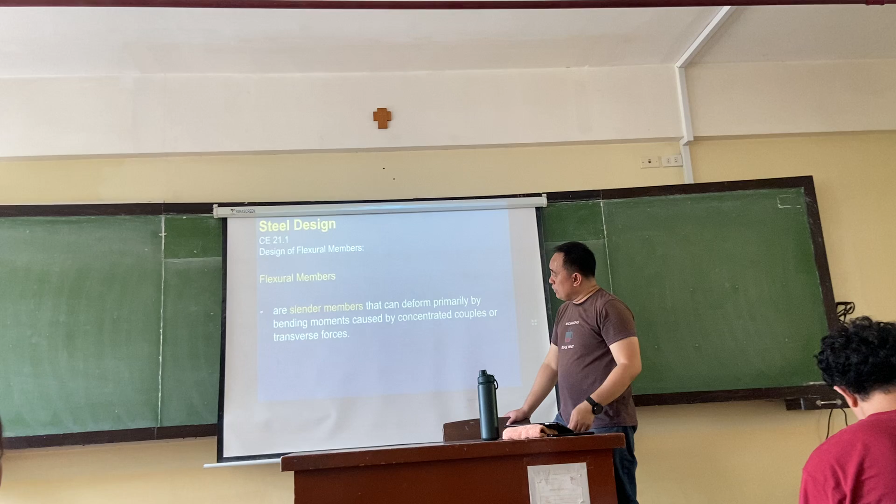We are going to learn about flexural members, our flexural members. These are basically slender members that can deform primarily by bending moments caused by concentrated couples or transverse forces.

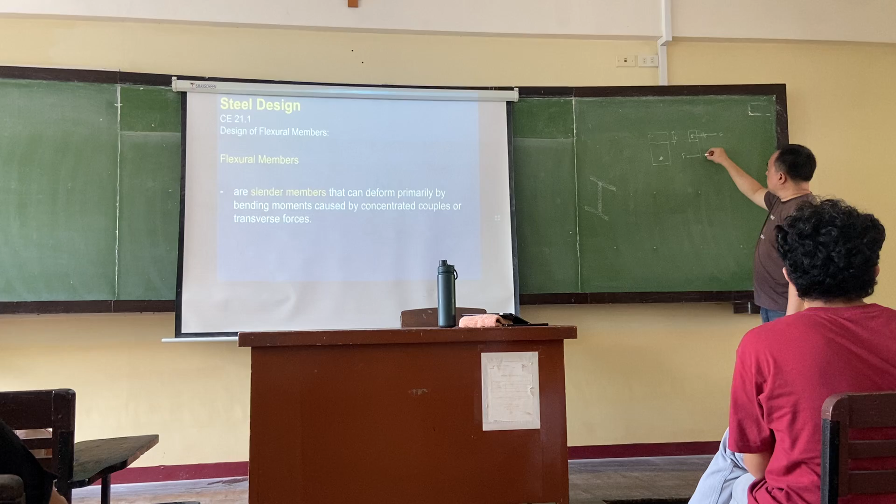So these form - a very common example is the RC rectangular beam. There is a compression force C, a compression block, and then somewhere here is your stress, opposing in opposite direction, separated by some distance, in this case d minus a over 2. This will create your moment.

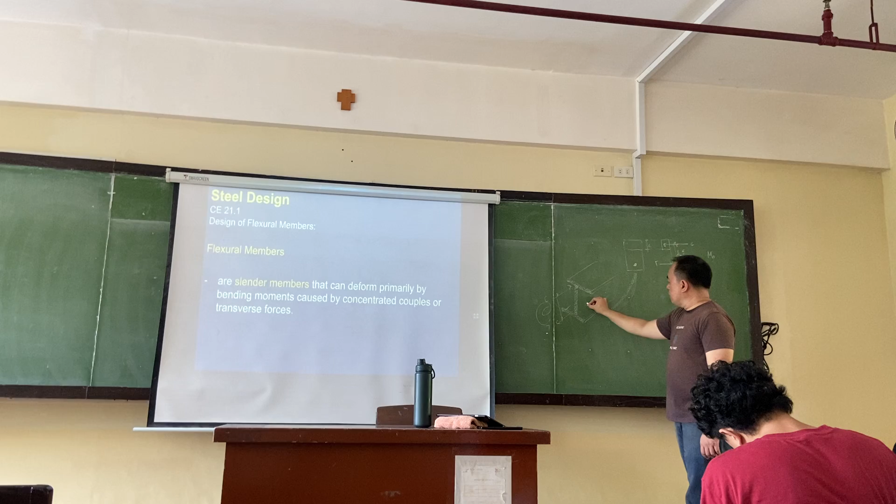If this is your wide flange, for example, and we apply a load on it, the upper fiber will be compressed and the lower fiber will be in tension. Together with that separation, they will create a moment which will cause your beam to bend that way, or if the force is applied the other direction, it will bend toward that side.

It's the same concept, but the parameters are different because we are talking about steel instead of concrete. We will be dealing with this, and we will follow equations from our NSCP for the computation of our nominal moment.

Of course you already know this - you have your beams, and then you have your beam columns. Actually, all columns can be considered as beam columns because aside from axial forces, we also have some amount of flexure in your beam column.

So for our flexural members in steel, we will be computing for the nominal strength - in this case, our nominal moment. Same as before, for LRFD we will have our reduction factor, now with subscript b, denoting that it's for bending.

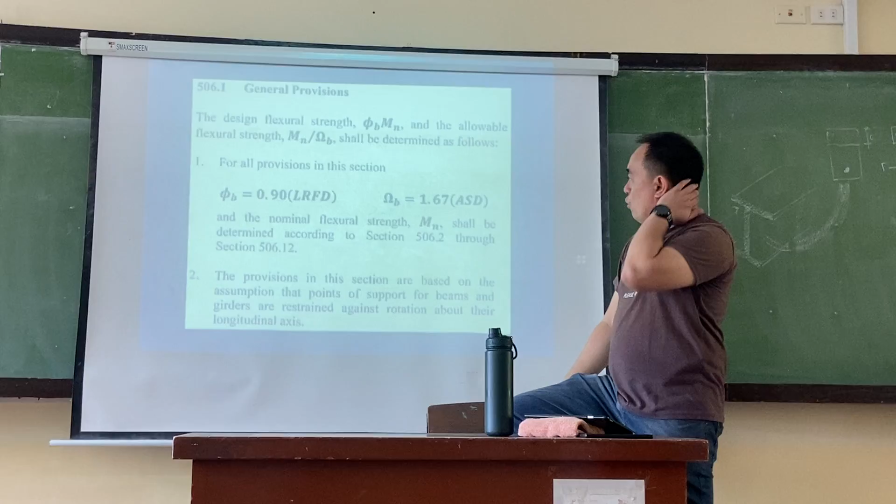But if another notation is used, you can omit the subscript as long as you know what you're doing, since it's actually the same for all provisions. In this section, your reduction factor is 0.9, and your safety factor is 1.7 or 0.6, for your nominal flexural strength, or nominal moment, denoted by M sub n.

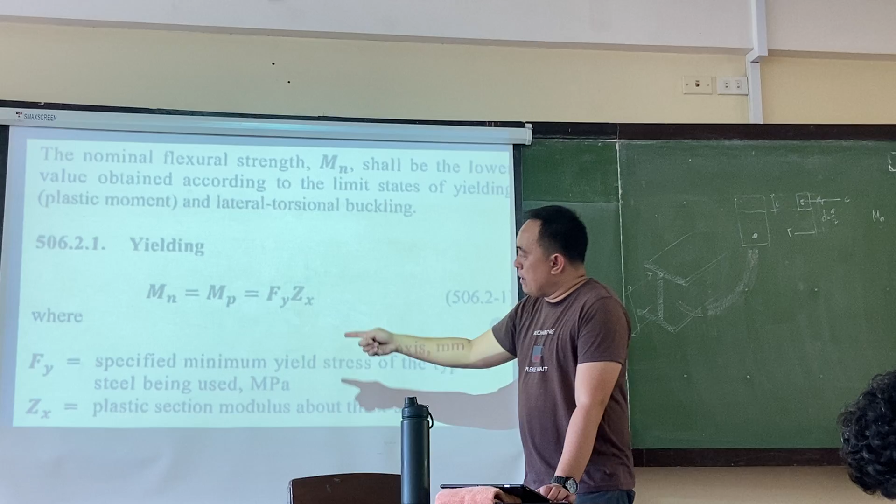So in computing, you have your Mn equals Mp equals Fy times Zx. And then you have here a different factor, your Z sub x - instead of the typical gross area or effective area, you will have this Z sub x, which is called your plastic section modulus. I will explain later where that comes from.

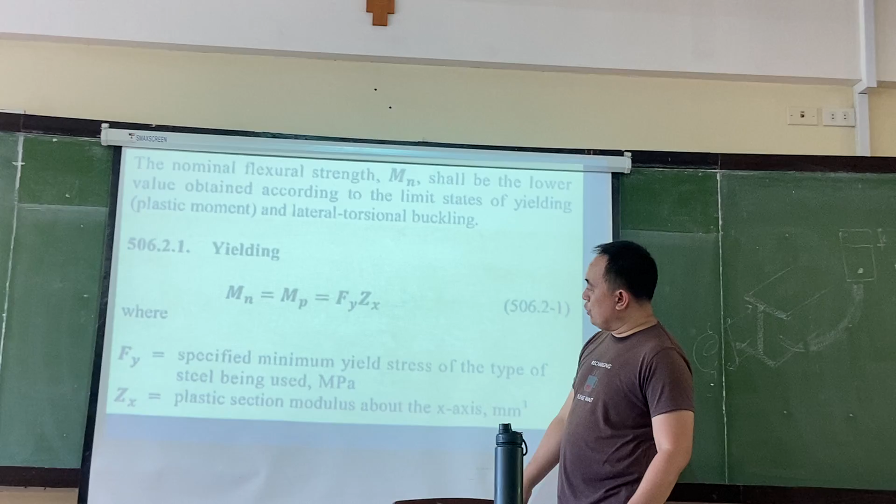Of course, your Fy is your yield strength, and M sub P here is equal to your nominal moment - your M sub P is actually called your plastic moment, that's why it's subscripted with P, because you're calling that your plastic moment. We will try to explore what that means in a while.

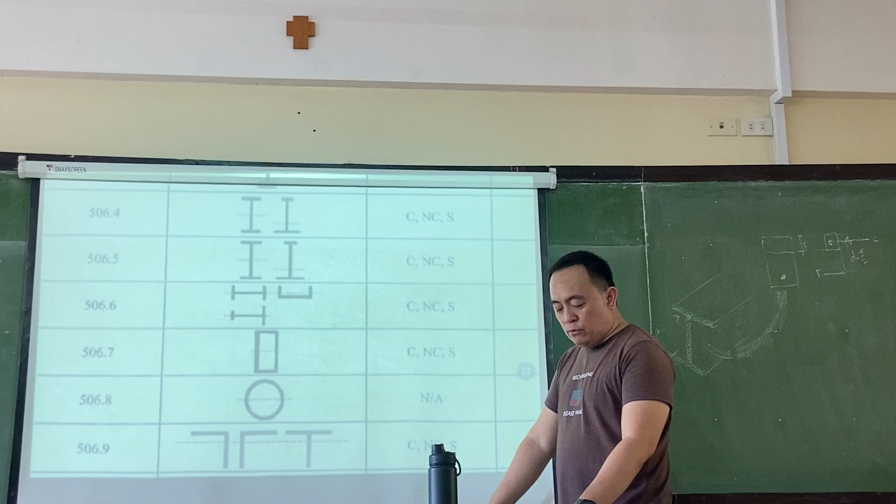So these are your typical sections that will be used for your flexural members. Of course, you will be dealing mostly with your wide flange or your channel. In some cases, as I mentioned in the last session, there are cases where the section is tilted, and there are some implications of that to how we're going to compute.

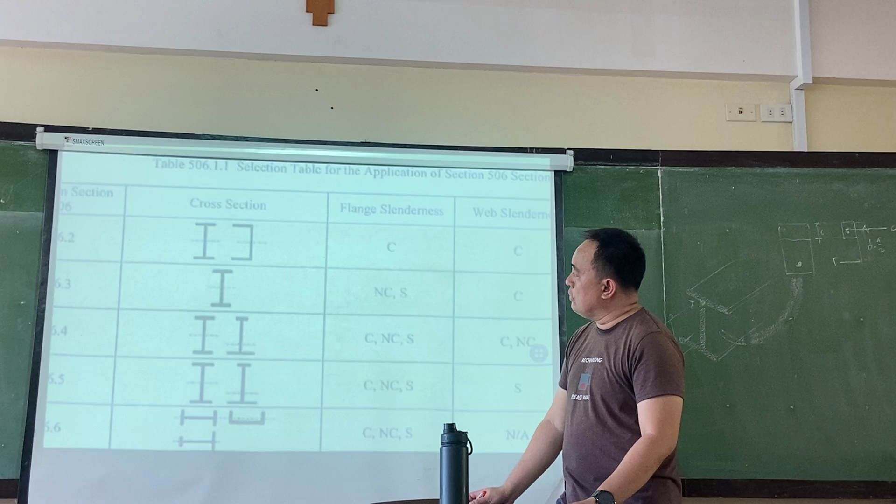We also have those double T's, double angles and T's, but for most of the discussions in our lecture, we will be dealing with these sections here, and perhaps in some cases angle bars.

What that is, we have lateral torsional buckling. We have our plastic moment, as we mentioned, the plastic moment. Before we could understand that, let's try to explore first what this is all about regarding the plastic moment.

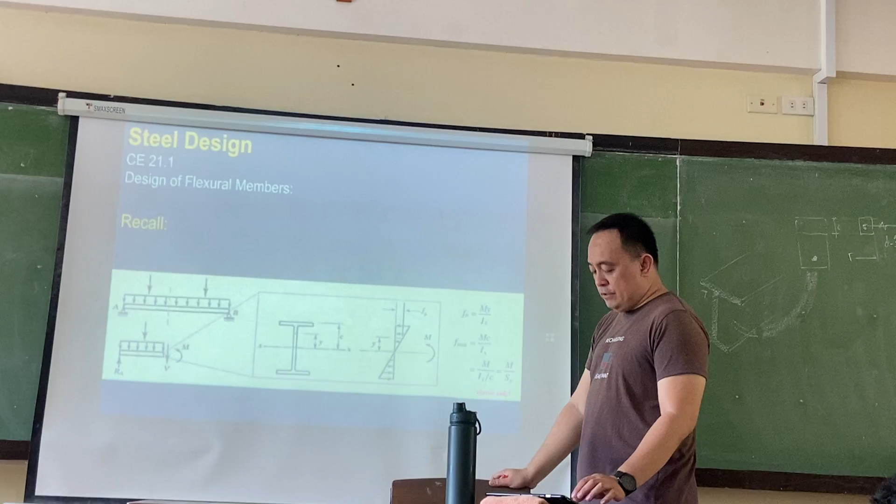Because in a while you will be dealing with stress diagrams - in your RC you also dealt with stress diagrams. So we'll also be dealing with another stress diagram here, although it's simpler, maybe, since it's lighter to work with.

So we have here a beam. Basically this will go back to your strength of materials, in which it's derived from the flexural stress equation, My over I, or if at the very top, that's your MC over I. So if you cut a section here, which you're probably familiar with cutting a section, you will have this section, and the stress diagram of that will be something like this.

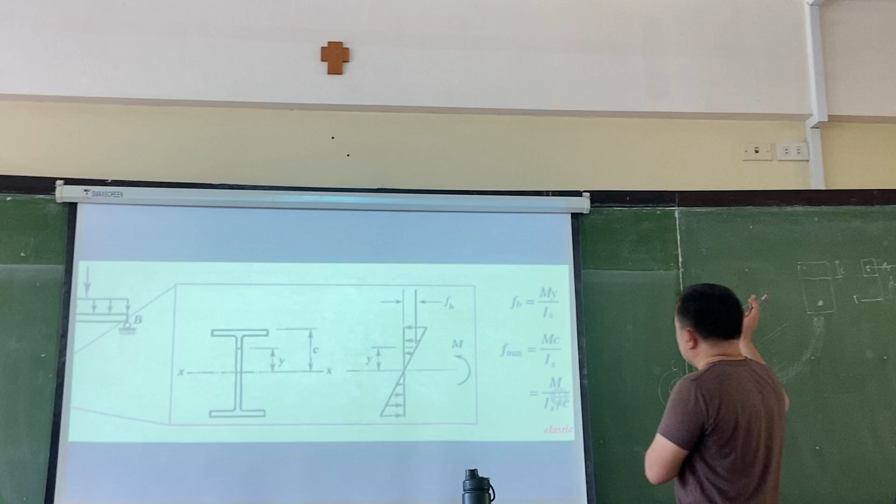This stress diagram has not reached its full capacity yet. Somewhere in here, your flexural stress is a function of your vertical distance from the neutral axis. So the smaller the distance, the smaller the stress, and as it approaches the extreme fiber, the stress increases.

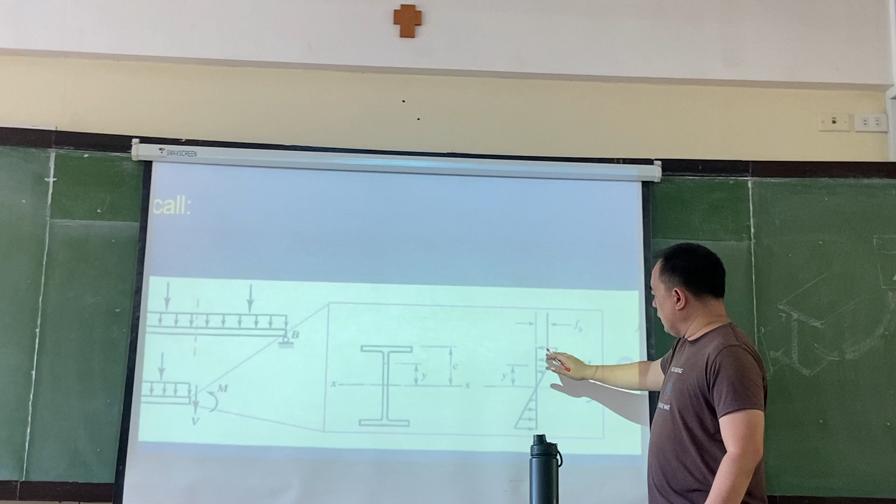Somewhere along the line, before it reaches the extreme fiber, you will have this diagram. Again, it's equal because the neutral axis has remained in its place. But as we go along with it, it will eventually reach its capacity, and we will go back to that in a while because it's an important part.

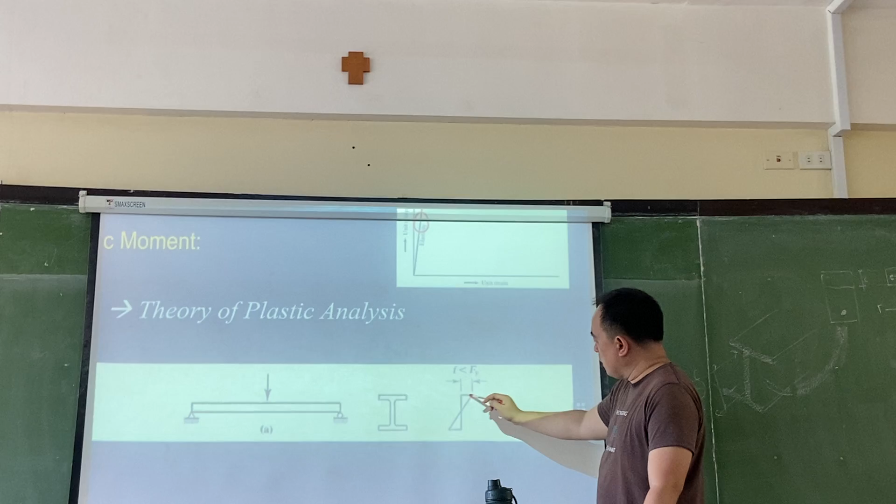For the theory of plastic analysis, you have your stress-strain diagram. We have our elastic stage, in which after yielding we now proceed to the inelastic stage. What happens here is that it's not yet fully stressed. It still has carrying capacity in terms of stress, but eventually we can keep adding load, so we can push it.

The bending will also be more pronounced, and eventually it will reach its yielding capacity. Then we see Fy here. Once it reaches that stage, it has fully reached the extreme fiber, so the stress diagram becomes a bit larger.

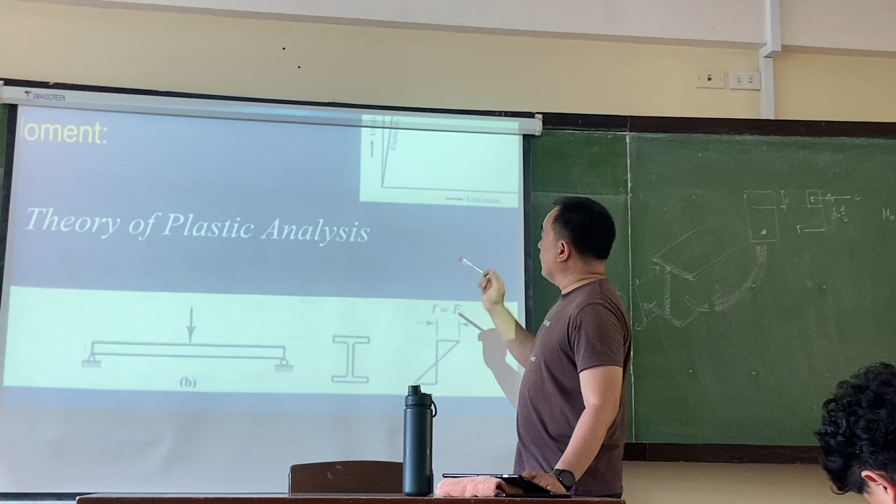Eventually we keep loading it because we're loading until failure. What happens during this plasticity stage is that once your extreme fiber has exhausted its capacity to resist the flexural stress, it passes the stress to the fiber that has not yet been stressed, the one directly below it.

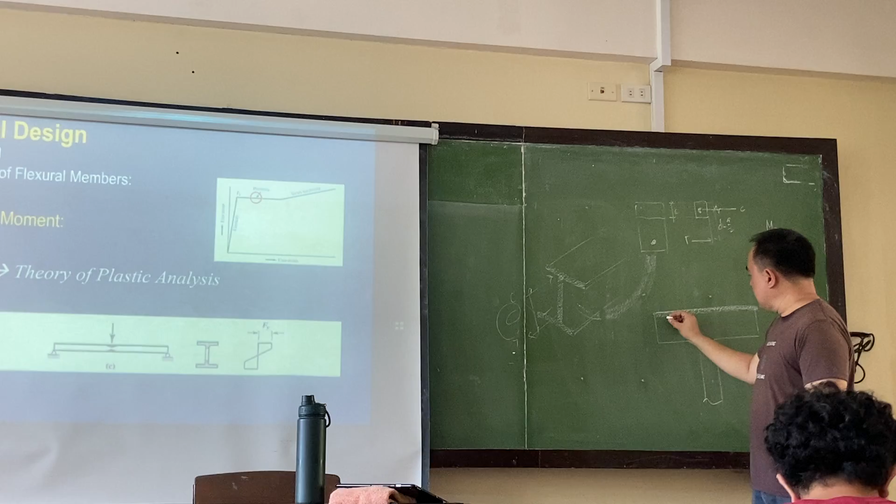Directly below it. So if this is your beam, for example, this part has already been stressed. After that, once stressed, it passes it to the next layer. Once this layer is stressed and its stress capacity is exhausted, it passes it further down.

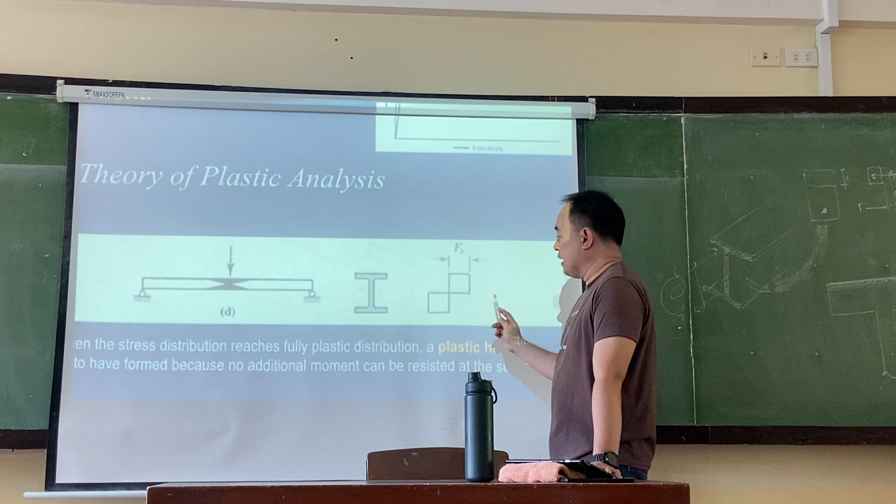So instead of a triangular shape, it will eventually flatten out. So when it reaches this part, it will reach its plastic moment. This is when your stress distribution will reach its full plastic distribution.

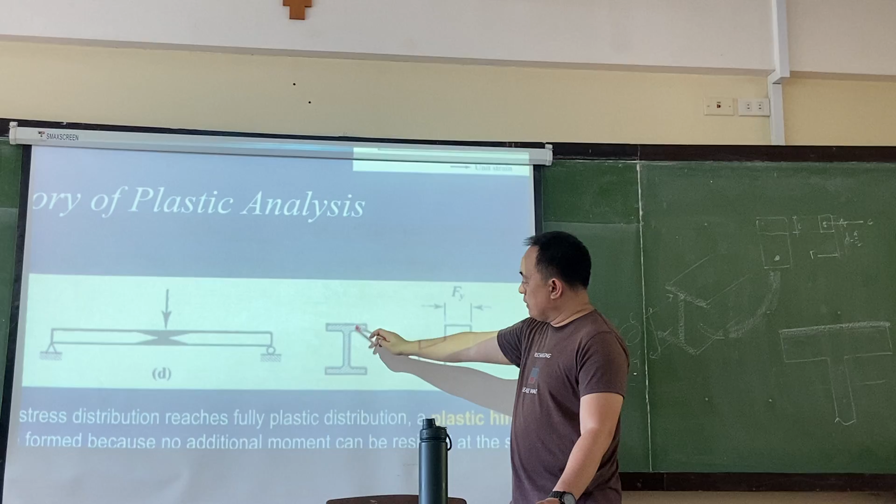Again, when the stress distribution reaches its full plastic distribution, a plastic hinge, a theoretical hinge, is said to form because no additional moment can be resisted at the section. So basically, it becomes hinged. If that happens, the beam can now rotate because it cannot resist rotation, and in this case your entire section has now been fully stressed.

So there's no more room for your stress to go. There's nowhere else for your stress distribution to be absorbed. In that case, once the plastic hinge forms there, this will finally make your beam fail, because it becomes unstable.

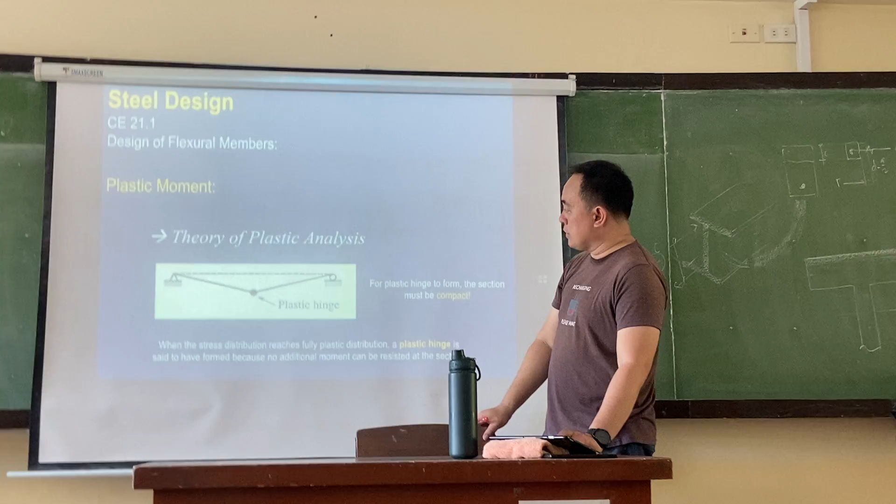If you remember your earlier lessons, this hinge will make the structure unstable. But for a plastic hinge to form, the section must be compact. Later on, we will define what makes a section compact.

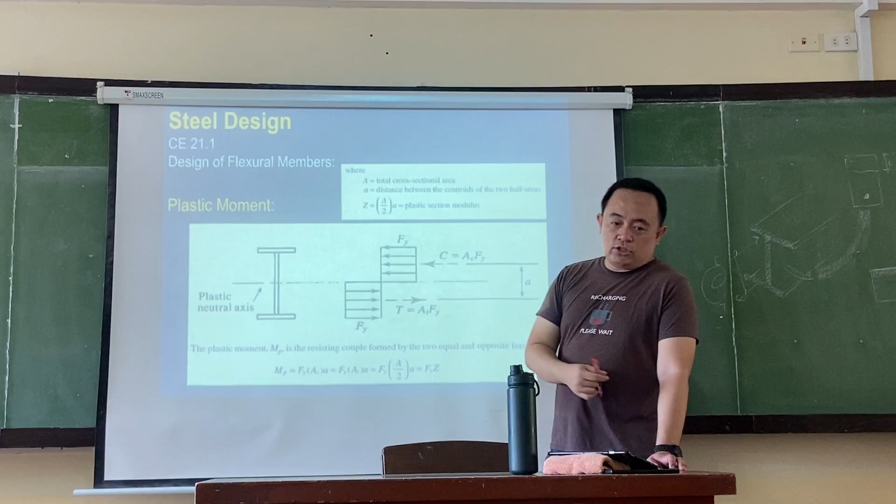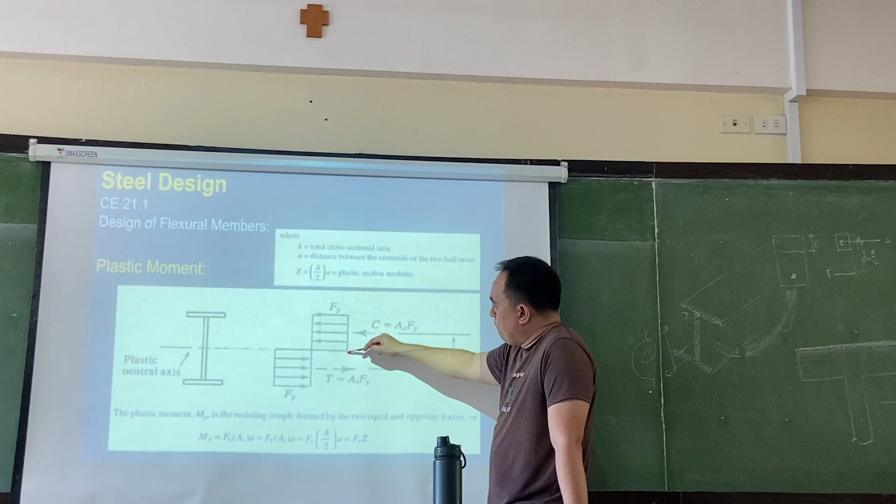But still, the area of your steel times its yielding capacity, or yield strength, applies similarly to reinforced concrete. The difference is that here it's fully stressed at the neutral axis, and the tension zone is also fully stressed. This couple here will be separated by your A.

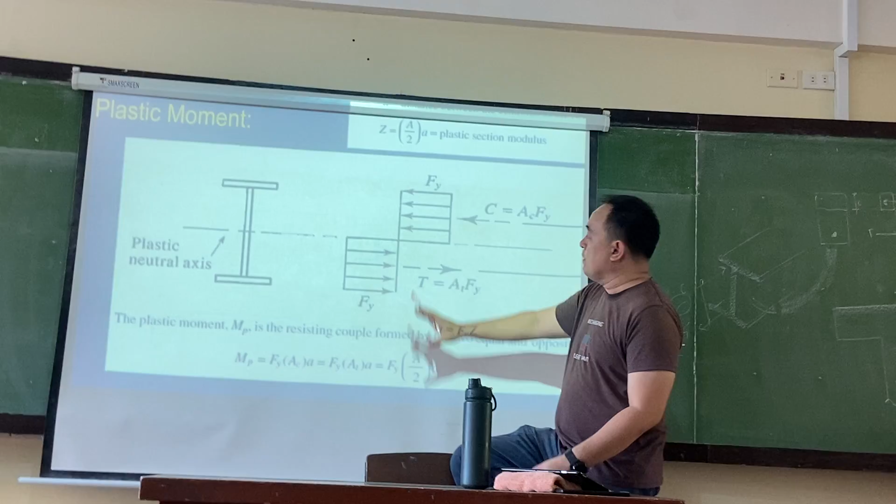This A is not the same as in reinforced concrete, which uses beta times C, or 0.85 f'c something. We will have a definition for our A and Y. So for the plastic moment, MP, the stress diagram would look something like this. This is something you will try to remember for our quiz or exam.

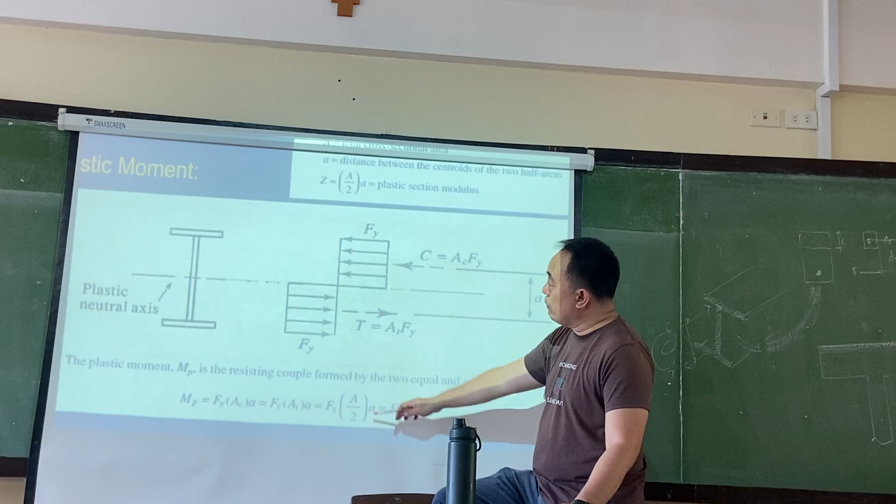So this is if you're going to rotate our compression stress here, you will have your Fy times your area of compression times your moment arm, which is A. Or in the same manner, if you're going to rotate here, you will have your Fy times the area of tension and then your moment arm of A. So basically you will have area over 2 times your Fy times your moment arm. So area over 2, because your neutral axis is at the mid-depth of your section.

And then you have your A here, and collectively, this A over 2 times A, small a, we call that as your Z. So this is your plastic section modulus. There are many types of S.

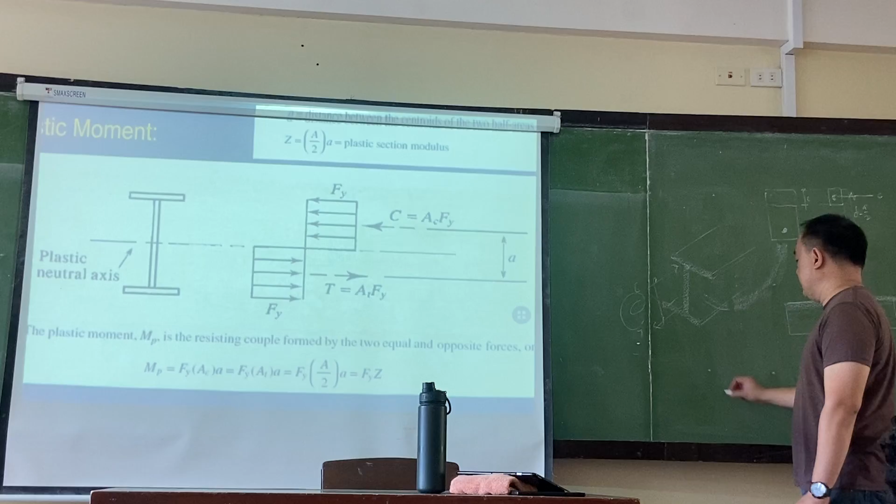This is your S. M over S for your flexural stress, in which your S is defined as I over C. I think it's I over C, yeah, it's I over C. This one is valid for the elastic zone.

But for the elastic zone and plastic zone, you will have your Z. This is the plastic section modulus of your steel member. And this divides it.

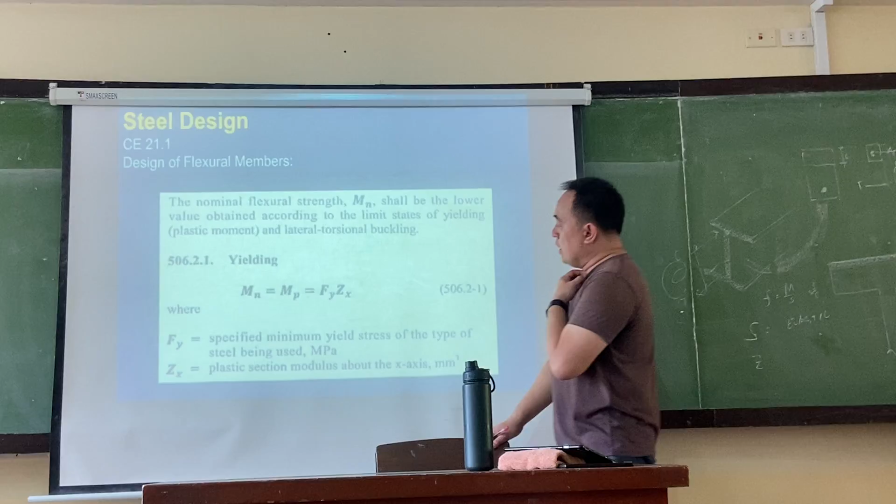So going back, we have our definition here of our yielding moment, in which our nominal moment will be equal to your plastic moment. So very similar to your RC when we try to derive the nominal moment, so from the stress diagram. In this case, it can also be called your plastic moment. And then you have your plastic section modulus here.

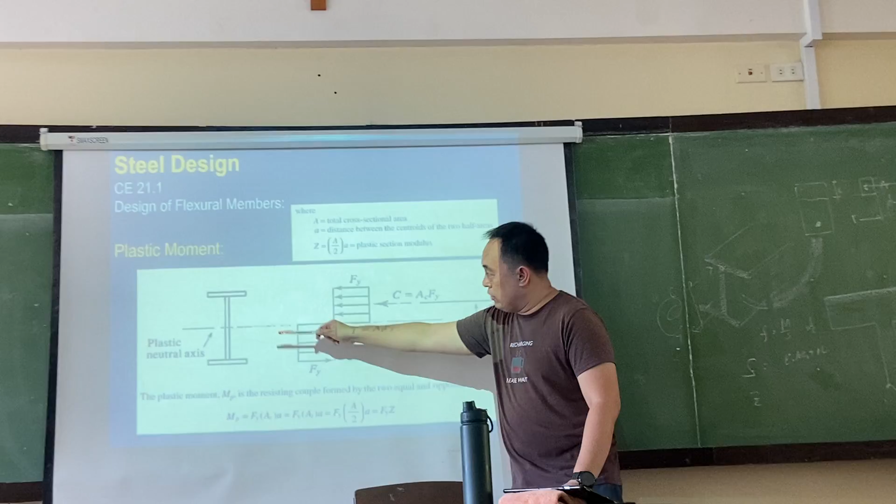About the x-axis, as in our derivation, this is our section. This is the x-axis, for example, and this is the y. So it's not rotated, so that your beam will deflect this way. So the x-axis is perpendicular to the body. This one is along, so you will have your beam along that axis or above that axis.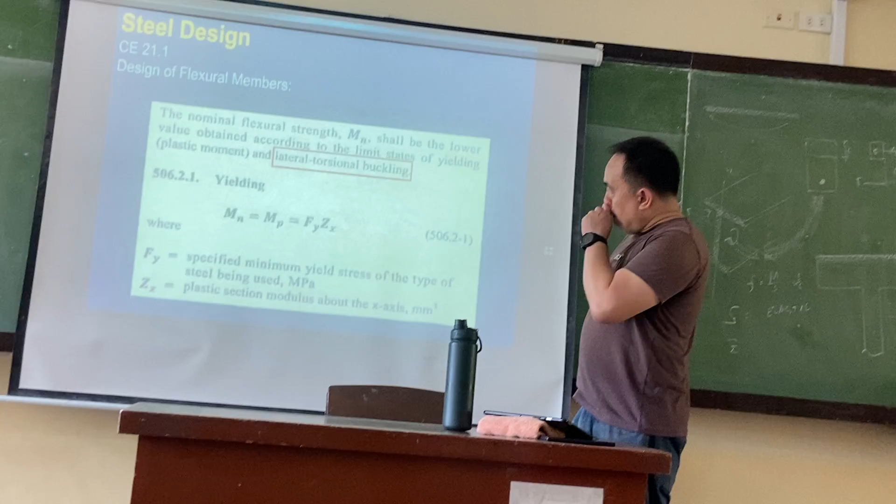And then it has also some lateral torsional buckling that we also need to consider. Similar to a compression member, that's flexural torsional buckling. So in bending, you have your lateral torsional buckling, and we're going to discuss ways on how to prevent this form of buckling so that it will not be a concern anymore in your design. So what is that?

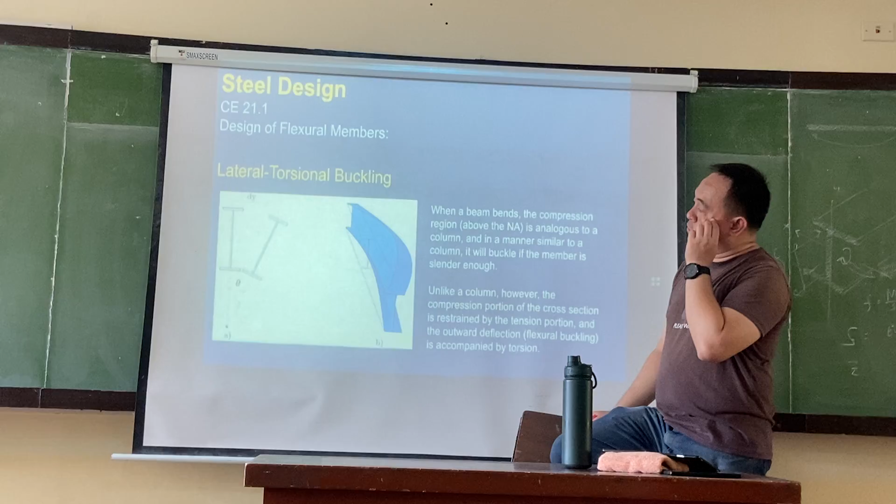You have already learned that in compression, flexural torsional buckling, where does it happen? It bends, then it twists. So it's the same here, except instead of bending, it twists. That means there's a horizontal force that will have an effect in your section. So in that case, it twists, and along with the twisting, your beam will also bend.

And then this form of instability can be prevented by bracing against twisting at sufficiently close intervals. So instead of worrying where to design for it, what is actually happening is we just brace it so it won't twist.

And then in order for you to do that, we have two types of bracings here. You have your lateral bracings and then you have your torsional bracings.

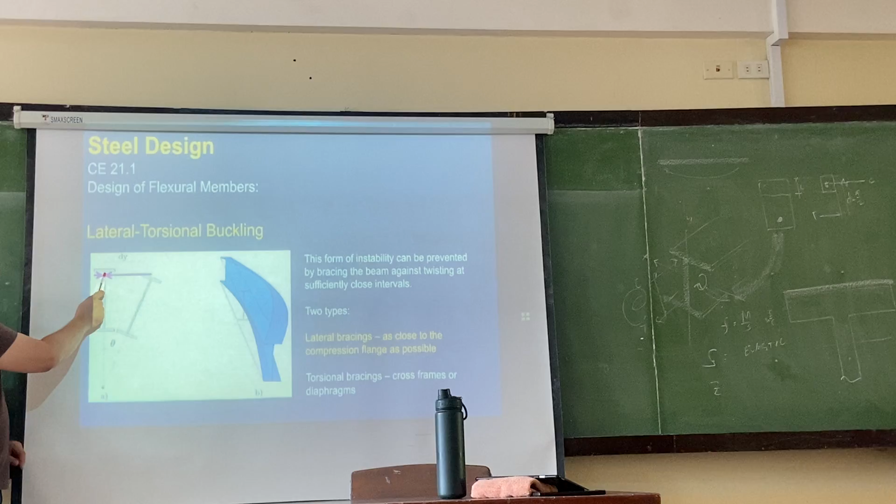For lateral bracing, you're going to place the bracing as close to the compression flange as possible, so that it won't twist, it will just bend. So you're going to have to restrain it at this point. If possible, that's the ideal, but if somewhere else it's okay too, as long as it can accommodate the movement, it's fine to restrain it there. That's for your lateral bracings.

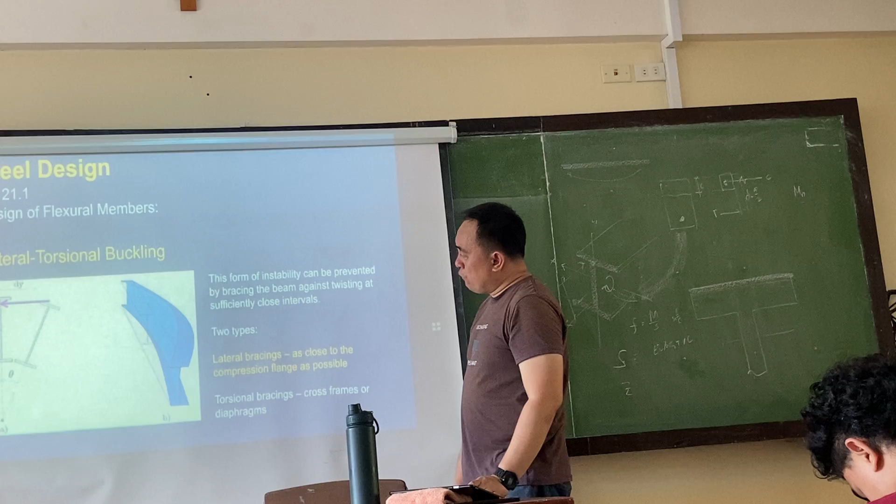And then for torsional bracings, you have your cross frames and then you have your diaphragms as well. So for torsional bracing, you will have some cross frames. This is very common.

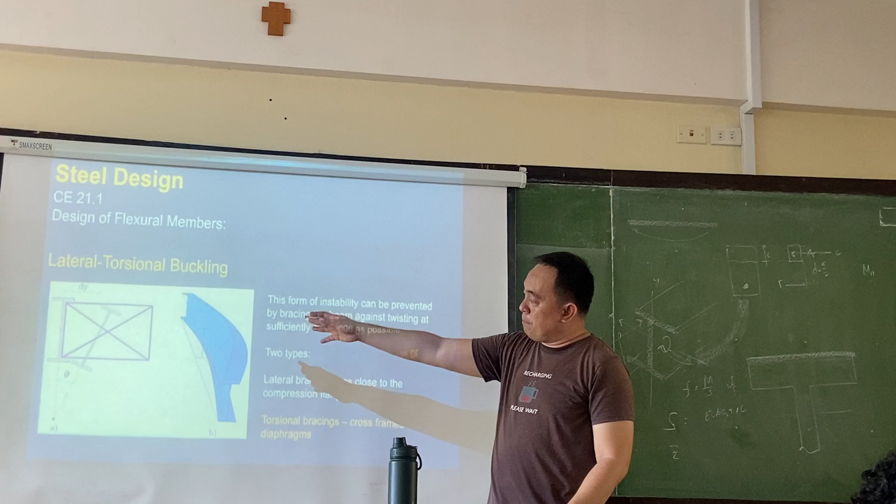If you've seen bridges or flyovers, you can see these things. And in fact, this was discussed in your CE15, that indeterminate class, where this is long and slender. Sometimes you have two or three panels with this design. So you have your cross frames there, and that's applicable to both concrete and steel, for example, bridges.

But we also have diaphragms, in which it's a wall, a solid wall, completely restraining the entire section of your steel member.

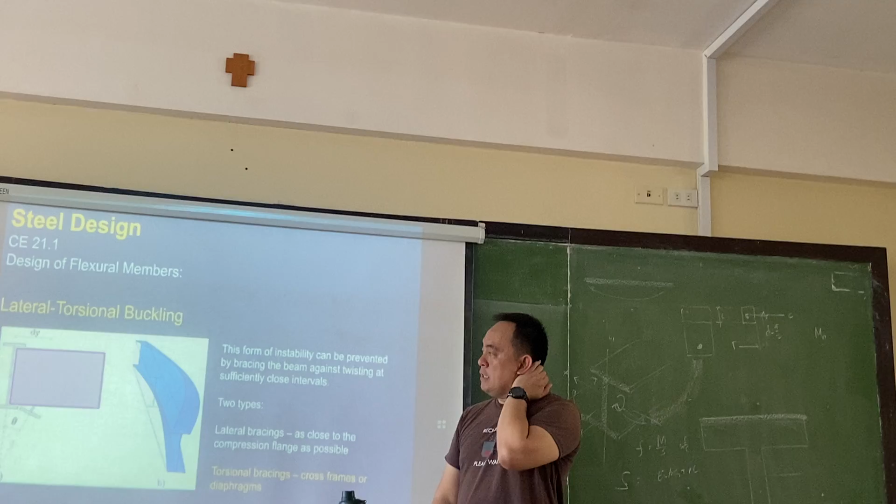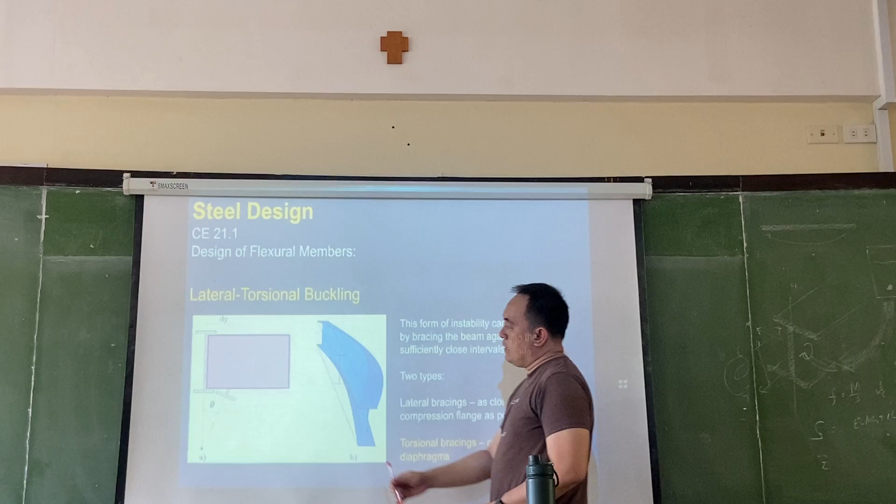For concrete, this can be monolithic, pagbuhos, or iapas lang, depende. But the important thing is that ma-fully restrain ang inyong section against torsion or torsional buckling.

You also have your floor as a form of diaphragm. So ini is wall, ini siya is floor, also considered as the diaphragm. In this case, your bracing will not act really as diaphragm.

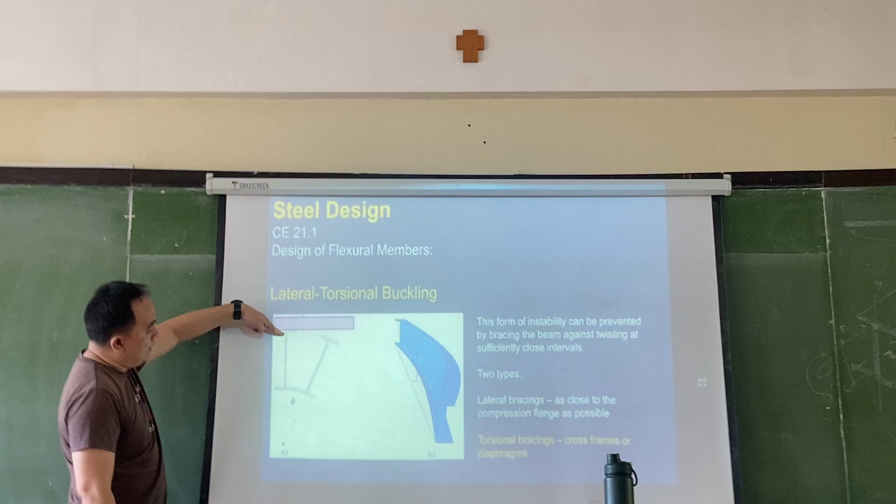It can also act as lateral bracing, because hindi man sa compression zone o compression flange na to restrain na ato beam. So theoretically speaking, you will have basically a lateral bracing.

This is why lateral torsional buckling is not a concern in RC beams. Because in your RC beams, monolithic man muna siya sa slab. So it will have this basically a straight, so di na kaya siya.

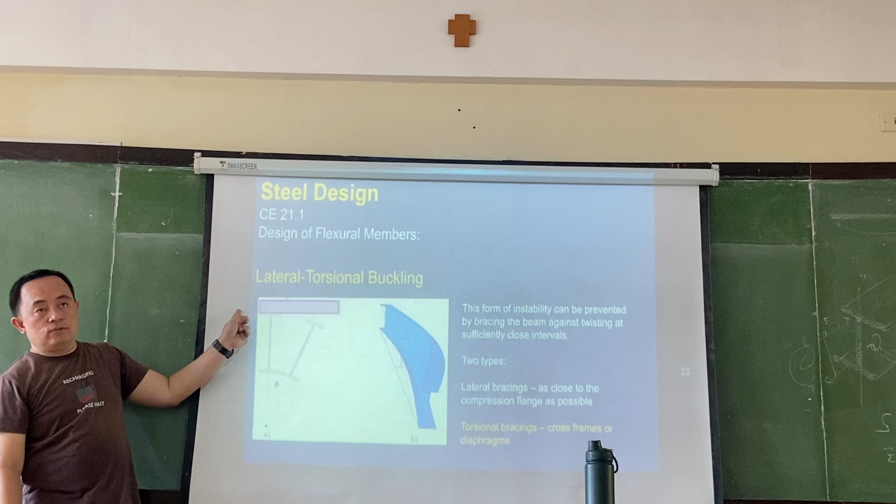If may slab, it will become a concern if wala siyang slab, open lang siya na beam. But of course, may mga stirrups na torsional provisions sa code that will limit the effect of lateral torsional buckling of our RC beam. So di kaya siya concern sa RC. It could be a concern, but case to case, in most cases it's not a concern.

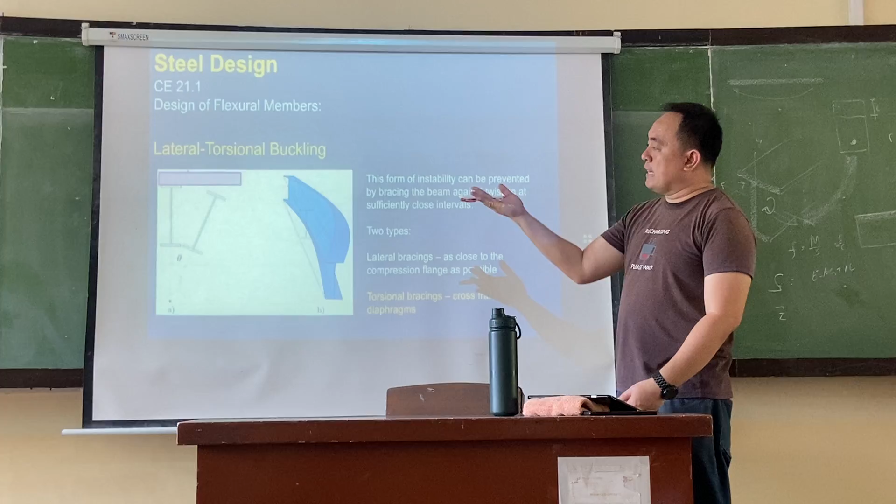But still we have this kind of bracings, so that our beam will not have this failure, or impacting load sa yung section.

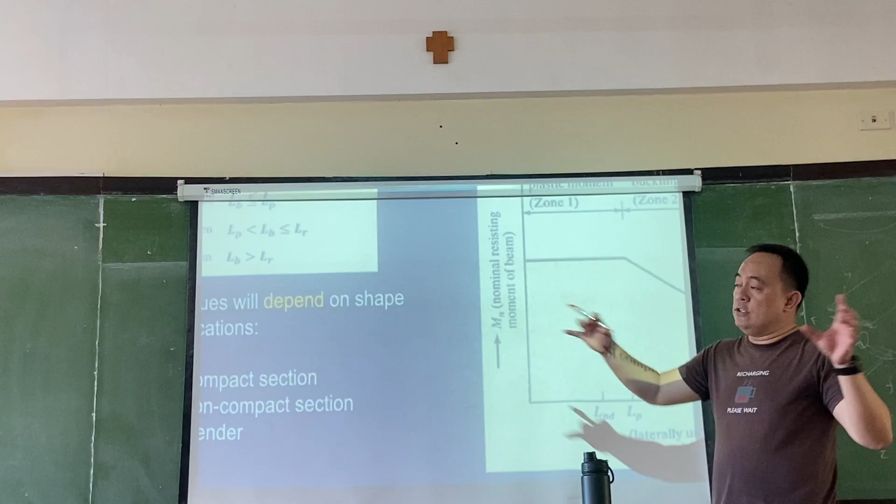Mentioned na ganina, of compact and non-compact sections. Actually there are three of them: you have your compact sections, your non-compact sections, and your slender sections. Slender meaning taas na yung siya with respect to its cross-sectional area.

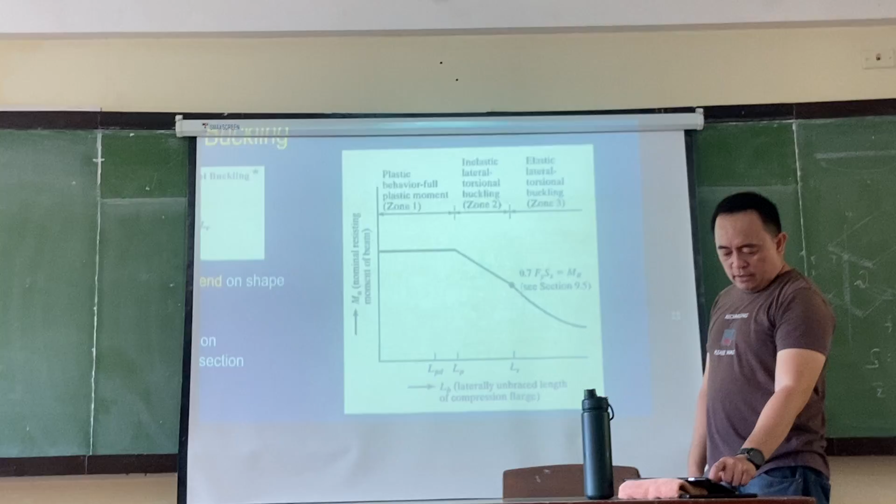How do we define these things? So yun lahat ay mga categories. We have here our LB less than or equal to LP, and you also have your LP, will be from LP to LR, and then LB greater than LR. So sama sila mga terms yan.

We try to look at this diagram here. This is your moment versus length na diagram. So if your section falls within this zone here, that is your zone 1.

Forgot the meaning of LB. LB is your unbraced length. Wala siya mga tuko sa kilid, kasi straight sa kilid. So that's your unbraced length.

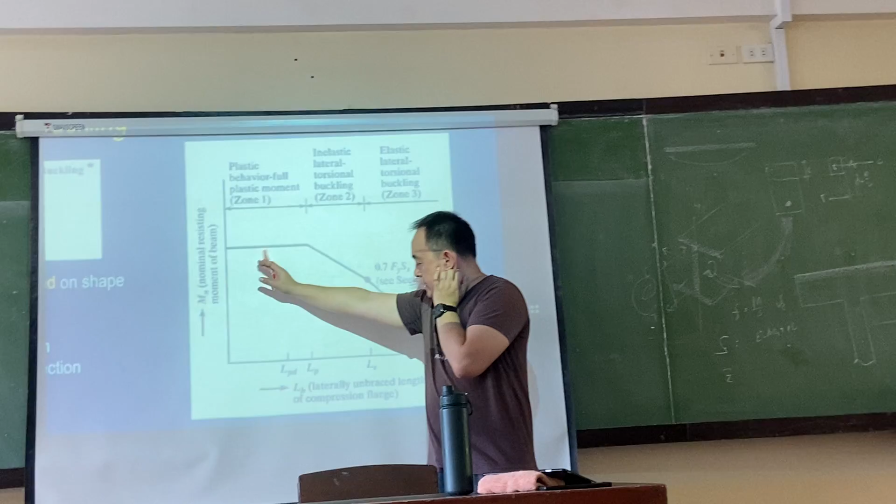We will have some certain equations here later on, so that we can identify which part of the diagram is your section. So you have your LP here, and then your initial diagram. This is your zone 2, and then pag-abutin na side will be your zone 3.

So sa zone 1, zone 2, zone 3, you have your full plastic moment, and then you have your inelastic lateral torsional for zone 2, and then you have your elastic lateral torsional buckling for your zone 3. So ito na nito slender na yung siya na section.

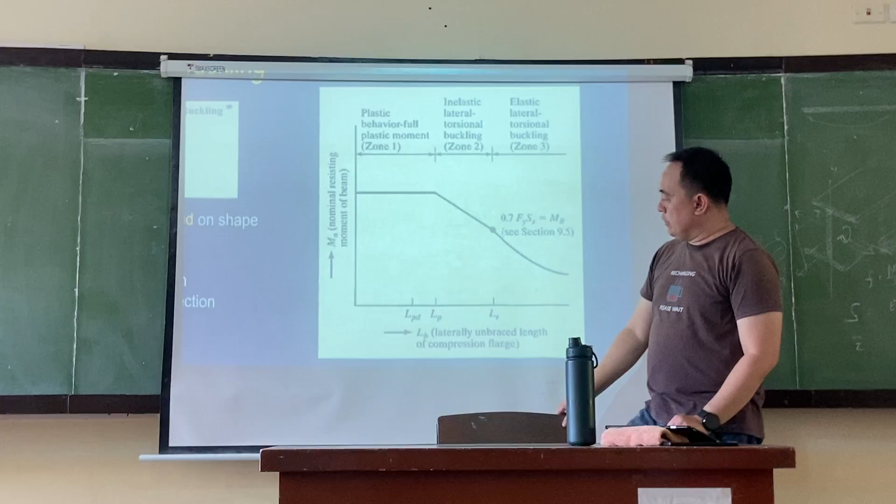By definition, you will have this, you're going to test our section in terms of its dimensions, its flanges, or sa web. So we have some testing to do, depende sa section. So how do we test if it's compact?

We investigate the width to thickness ratio. You have your lambda p for the upper limit for the compact, and your lambda r for the non-compact category. And then you have these limits here.

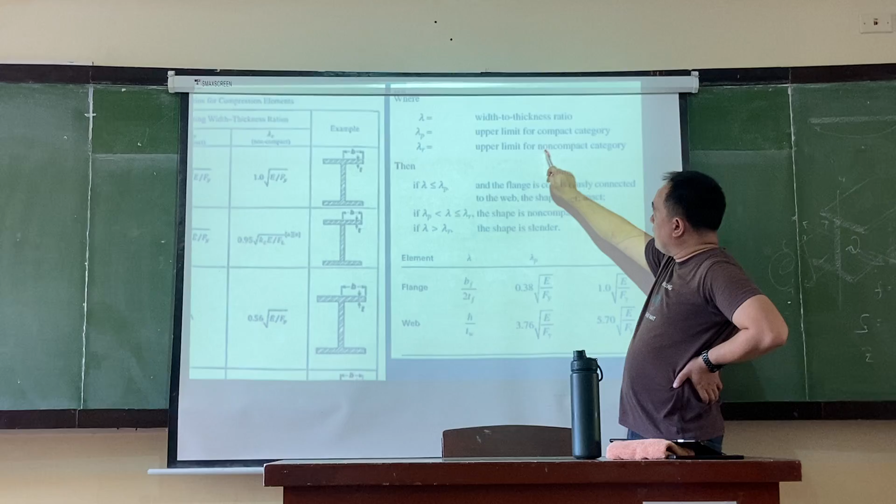If your width to thickness ratio is less than your lambda p, the shape is said to be a compact section. Otherwise, it's not compact or slender. If your width to thickness ratio is greater than the upper limit of your non-compact category, your shape is slender. Each one of these, compact, non-compact, slender, will have a different form of equations to be used for the plastic moment, or your nominal moment.

Before we go that, what is this width to thickness ratio? We're going to test our section, typically for our wide flange sections. So we have a test for the flange. We also have a test for the web. So width to thickness naman.

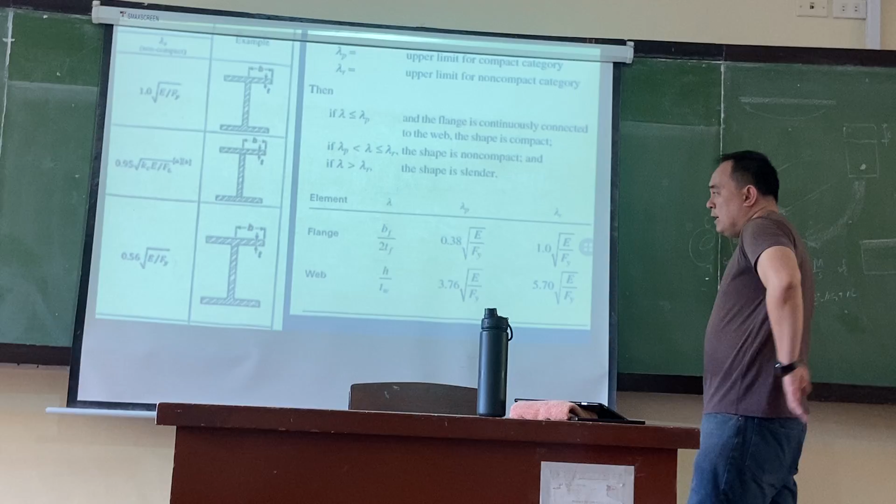Okay, so this is the width to thickness ratio of your flange. So B, this one, and then your thickness. And then for the web also, you have your height, and then the thickness of your web also.

So the lambda p here, this is your category for the upper limit for your compact category. It is expressed in this equation, 0.38 times square root of E over Fy. Help yourselves memorize this. If you memorized it as 4.71 square root of E over Fy, that is wrong, it's 0.38.

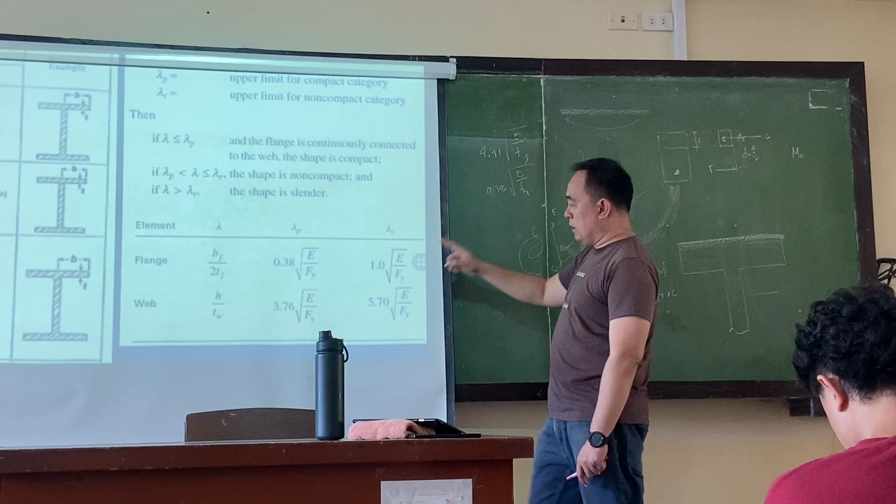Okay, and then we also have 3.76, 5.70, and 1.0. So those you always remember. So go ahead and solve, you can memorize that definition.

One thing you should note is that if your member is compact, not just the flange, when we test it, if it's compact in the flange and compact in the web, the section is a compact section. But if the flange is compact and the web is non-compact or slender, the section is automatically categorized as non-compact or slender. So both must be compact for the equations using compact sections to be valid.

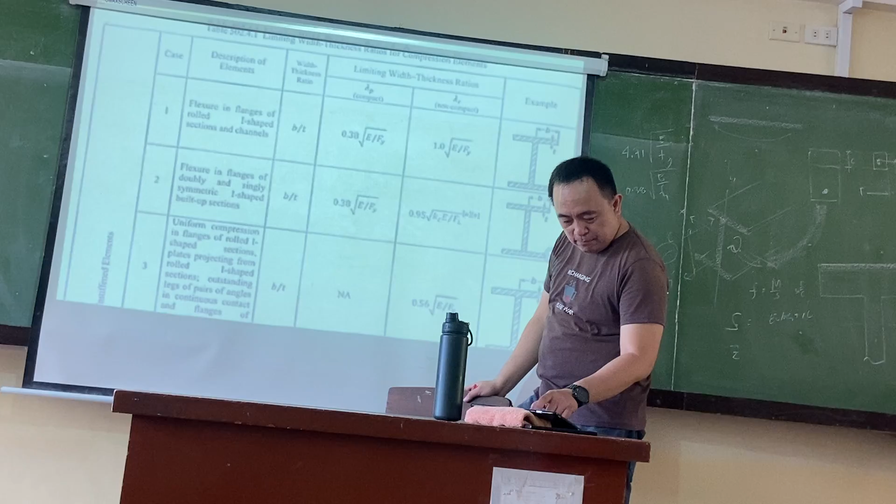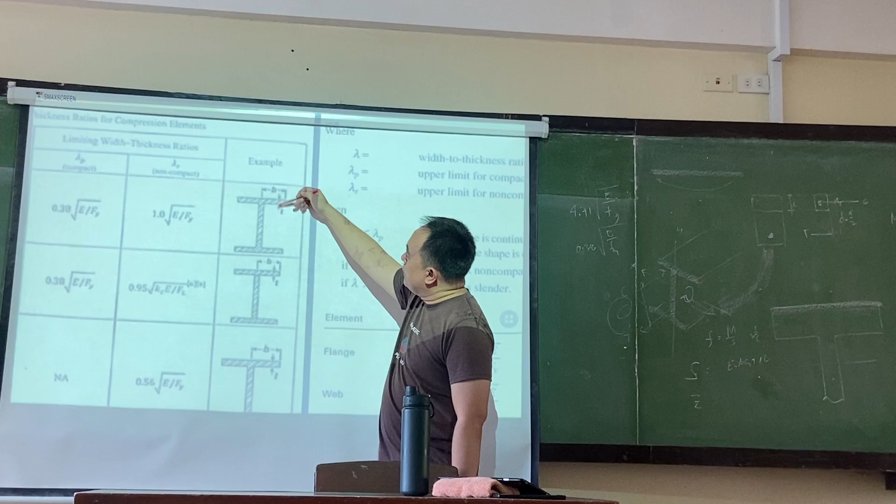And then some clarifications on this definition. Although it's a width to thickness ratio, in our code, the definition of width is basically just half of the flange. So it's not the full width, that's why you only consider half. I'm not sure why, but it's half plus whatever follows. But as for the width to thickness ratio, it's half of B, and then you have your thickness, that's for your flanges. And for flexure flanges, it's also the same here.

And we also have some cases for double angle. It says they're not applicable for compact, so I think it's only non-compact if it's an angle or double angle.

And then we go to the next diagram, since the previous three were for the flange. So this second diagram is for the web. For the web we have case number 9, flexure in web for doubly symmetric I-shape sections, which includes your wide flange sections. So for the compact limit, we have 3.76 times square root of E over Fy, and for the non-compact limit we have another value.

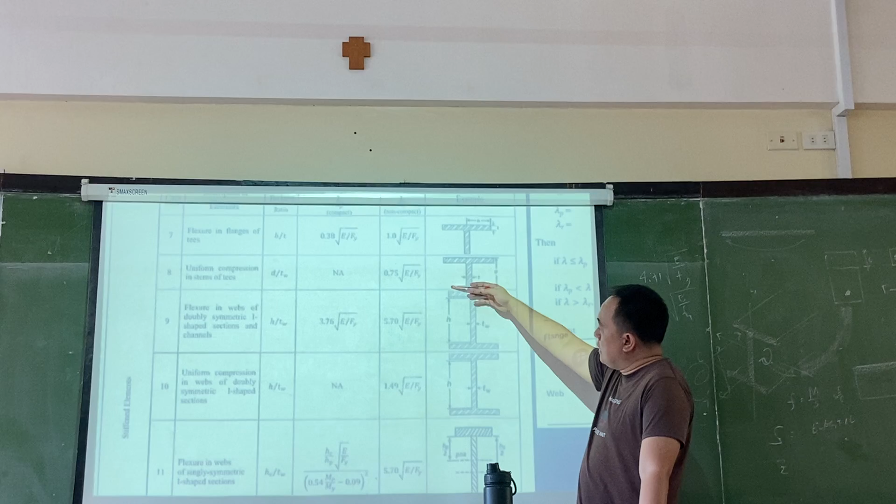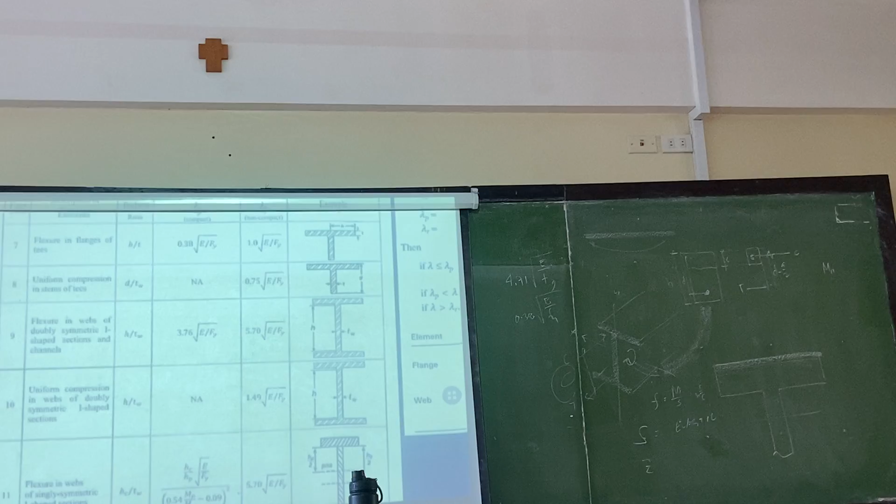This is the version for steel, since for steel sections this changes. This is your wide flange section. If you look closely at your wide flange section, in actual fact the corner is not actually a 90 degree corner, it has some curvature.

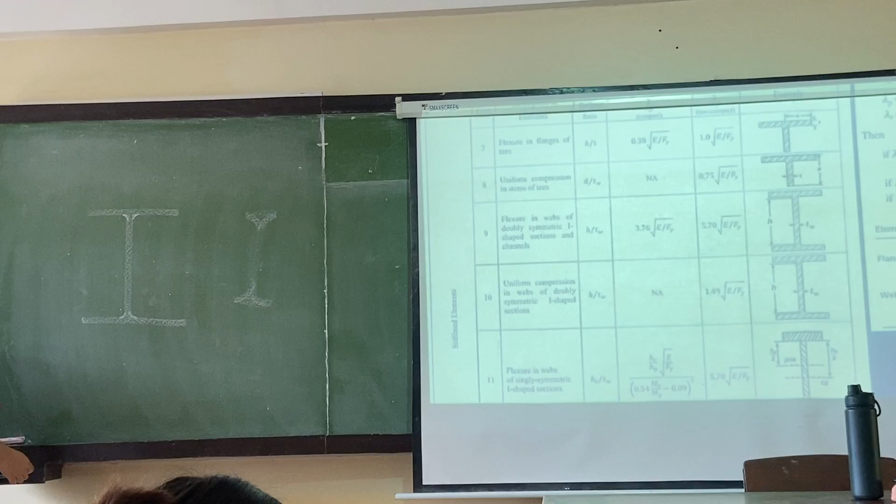So there's this particular distance involved. This distance here, that is what you call your k. And the same applies on the other side, also distance k. So what is H then? H will be this distance here.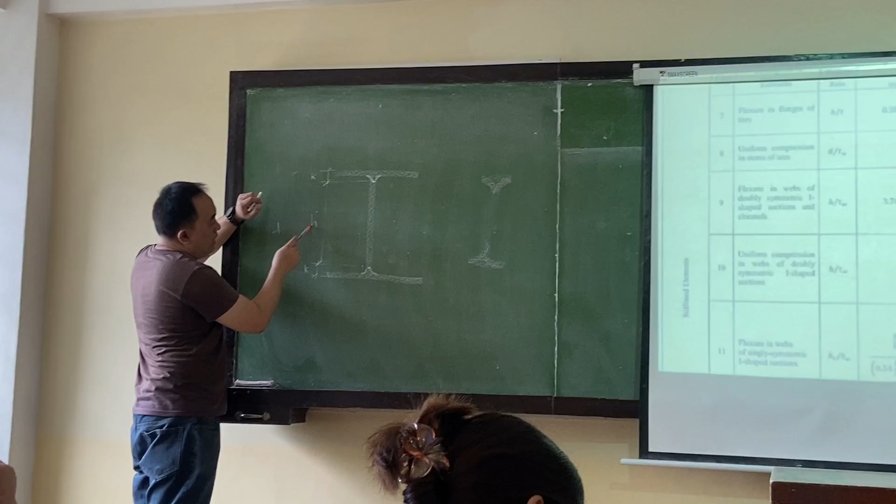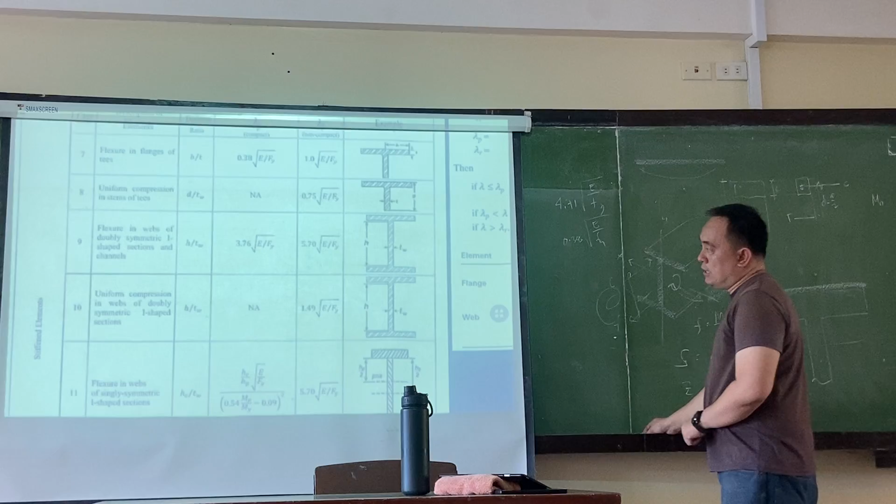So it's not the full height or depth of your section, but rather you subtract further. For your H, you have your D, which is the entire depth of the panel, or the entire depth of the section — you can find this in the table also — minus 2K, because K is the curve distance, and you also find that value in your table since we cannot compute it ourselves. So you have your H divided by the thickness. Again, the height is not simply D minus the thickness, but rather you need to consider the curve distance, as mentioned before. That's your curve distance.

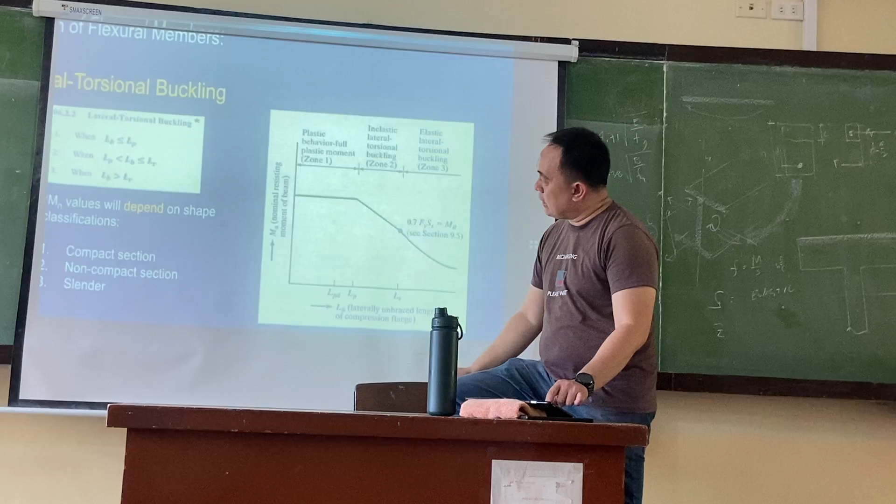Okay, so now we go to the compact section. Assuming a compact section, and going back to this diagram, we have 3 zones to consider, depending on where it falls relative to LP or LR. So for zone 1, your yielding capacity, or nominal moment in this case, is the dimension we discussed earlier, which is your Fy times Zx, and that is equal to your plastic moment. And recapping, your Zx is your plastic section modulus, which we defined earlier as this.

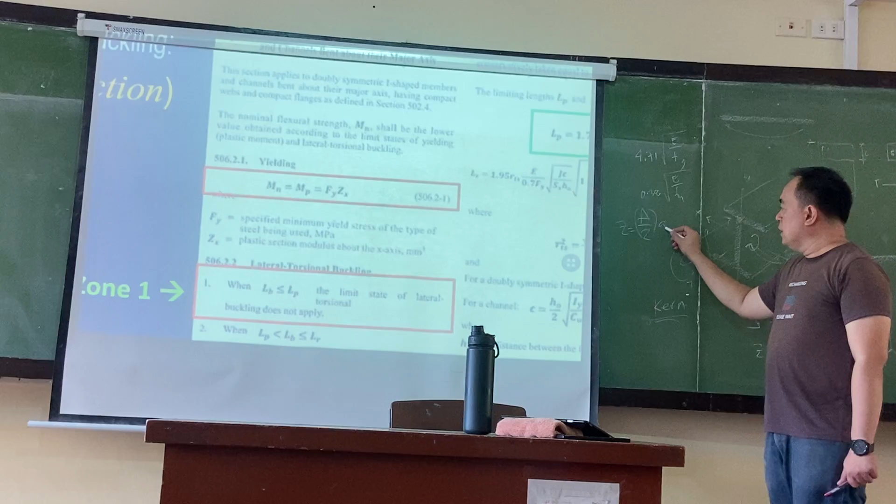Total area divided by 2 times your A there. So after that you need to divide later. So your A is the centroidal distance between your 2 centroids, no? Centroidal distance between the 2 centroids. So, sabay pasamot ana, okay.

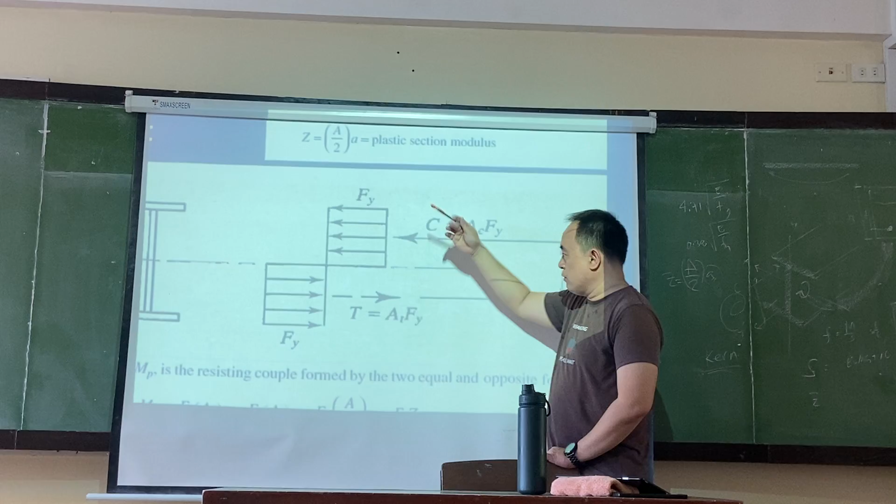So notice here that A would come from the centroid of this compression block, and then the other side is the centroid of our tension block. So centroid of centroid natin, so muna yung centroidal distance. So how do we compute that, sa atong example na siya para i-compute.

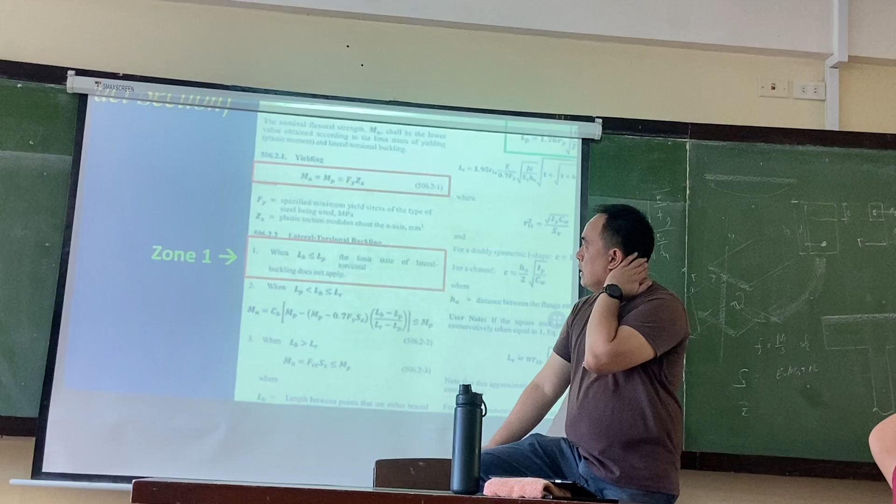So you have some test to do, no. So the test naman muna, kung compact ba siya or non-compact. And you found out that your section is compact, based on the width to thickness ratio ng mga equations. So if you found out that it's compact, you're going to test again based on the bracing of your section.

Section or beam, so if your unbraced length is less than LP — LP daw is the limiting laterally unbraced length for the limit state of yielding. Medyo split, mas sakta na siya sa an example. But we also have our definition for LP, okay, so LP daw, okay.

So you have your unbraced length, and then you're going to compute for your LP. So first LP is here, you have your 1.76 r sub y times the square root of E over Fy. So if your unbraced length is proven to be less than this value, then you're going to use zone 1, your nominal moment for zone 1 is that one, Fy Zx.

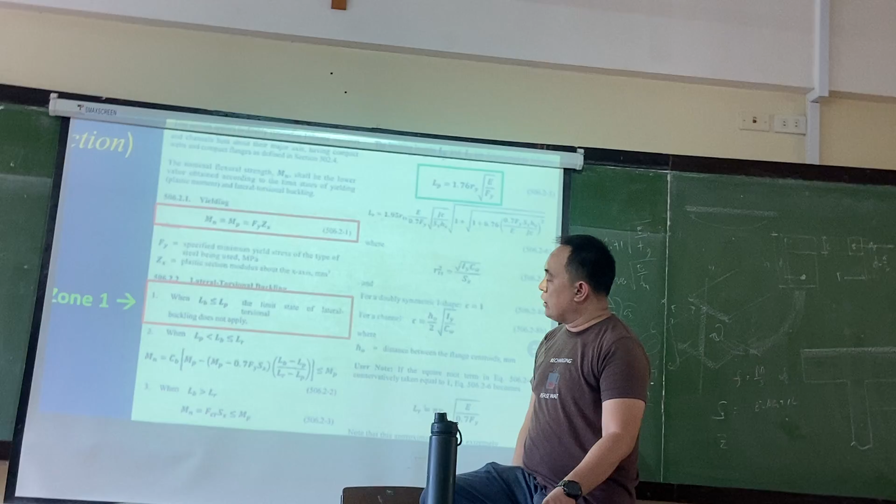However, you need to test also for LR before you can conclude that your section is within zone 1 only. I mean, kung zone 2 rin, no. If mag-zone 2 na ta, you need to test for your LP as well as your LR also. So you have them for zone 2.

Okay, so for zone 2, your unbraced length should be within the range of your LP and LR. And then if it's found out to be in between that — by the way, your LR is where is that? Okay, your LR is in.

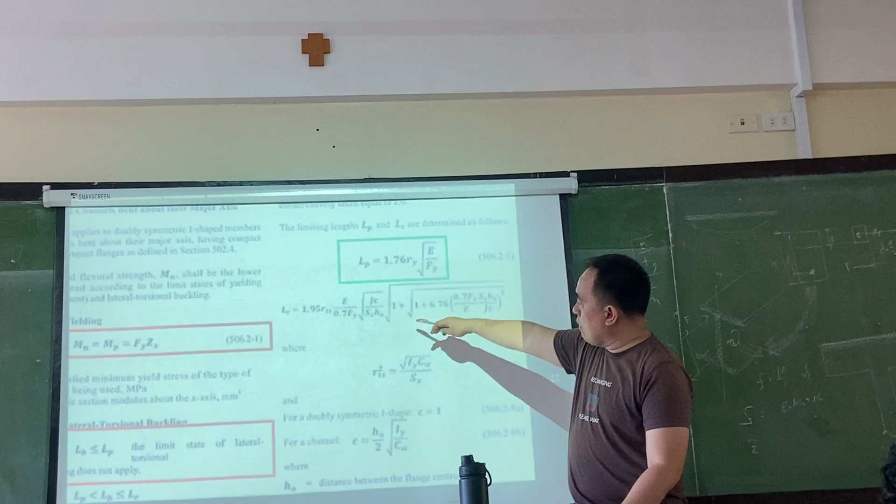Okay, that one, so you have 1.95 RTS times E over 0.7 Fy times the square root of JC over SX H0 — hindi pa tayo, no. Okay, so you need to memorize this, by the way. Oh my God. So if your unbraced length is within this region, between your LP and your LR, you have zone 2.

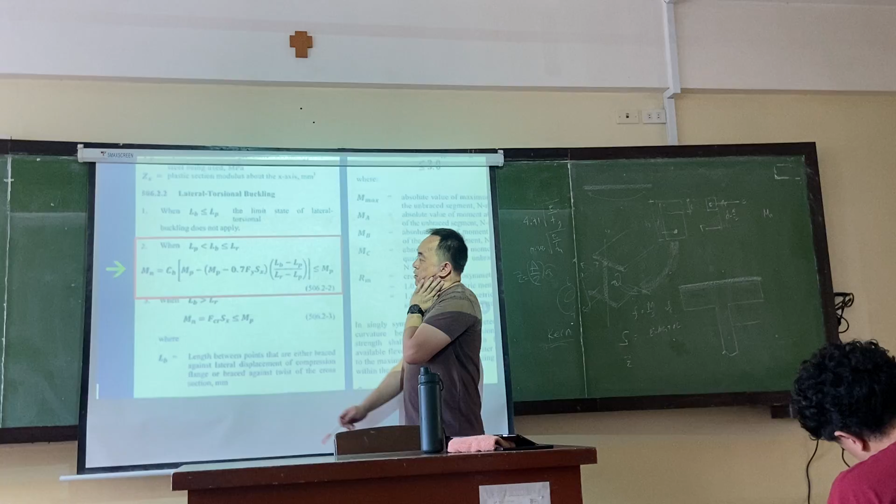Which you're going to compute the nominal moment capacity using this equation here. Okay, so you have your CB times MP, blah blah blah, LP, LR here. But this entire thing here should not be greater than your plastic moment.

So once kinsa man si plastic moment, balik ka din nila. So eventually, mag-compute ka pa rin for your plastic moment because you're going to compare your MN for zone 2. Dapat din siya mula sa plastic — mula pa sa galing, you're going to use this one because this is the limiting value.

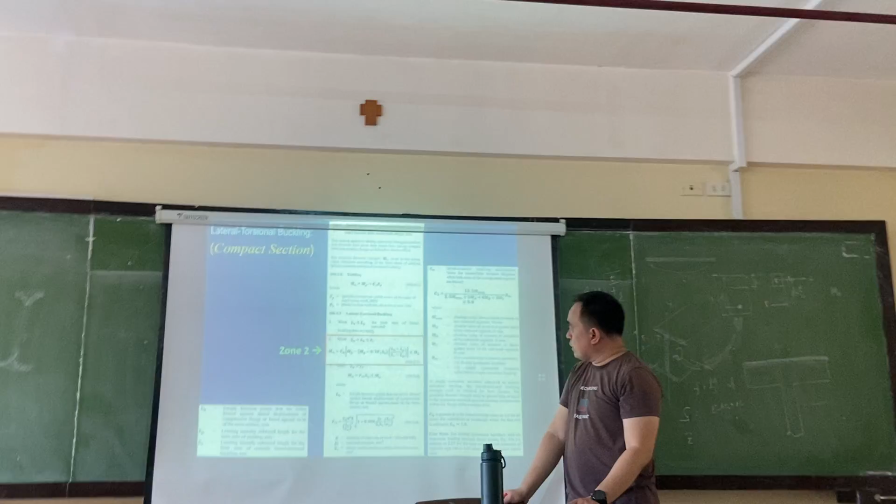Okay, and then if it's zone 3, okay, by the way, some notes on CB, we're going to explore this also. But in most cases, if not given a moment diagram, we will be using a CB equals to 1 because this is dependent on the moment diagram of your beam.

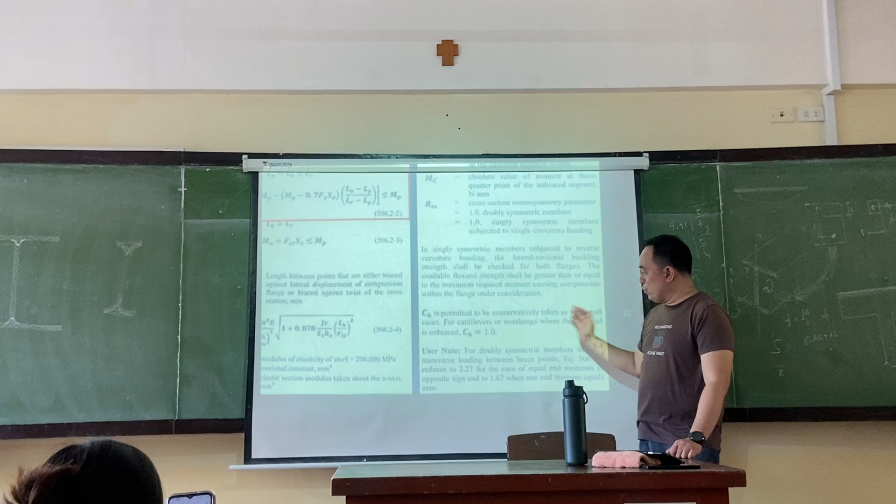But the problem will say, if you want to — we use the CB equals to 1 because it's actually permitted in our code to use just a CB of 1, conservative man sa design. For zone 3, in which your unbraced length is greater than your LR, it will now have another equation.

No? So FCR — FCR, in which your FCR is not the compression, your critical stress, it will be defined by this equation. So luckily for you, I don't think we will reach zone 3 anymore, so we need not worry about the equation.

Okay, for zone 3, so most likely, kung nakita lang, zone 1, zone 2 ra itong computations. Okay, so that's compact section, napunta ng compact in which maglahi po na iyang mga equations, but fortunately for you, again, mura din nagamit sa non-compact section.

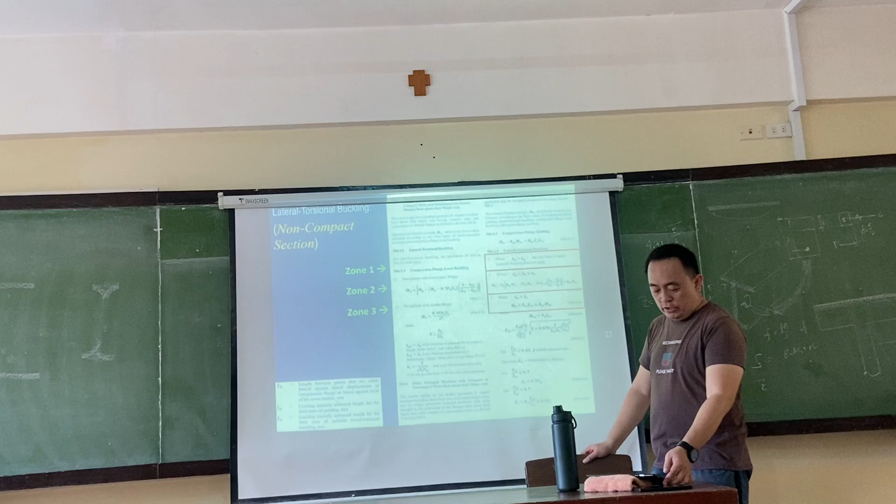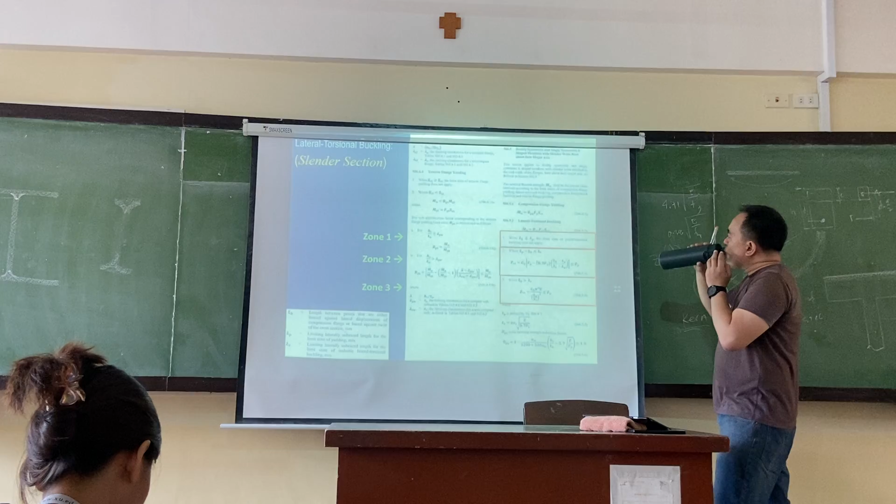I'm not sure sa inyong board exam if maabot pa mo, but just in case po ito nga sa inyong board review, it's actually here. We have some code provisions for our non-compact sections and as well as your slender section. Medyo na-delay ang display. Okay, so we also have there for different zoning for slender sections.

So, we now go to sample problem, isa lang siguro lang, adi tayo ni magkuha pang data. We need to learn first how to determine the plastic.